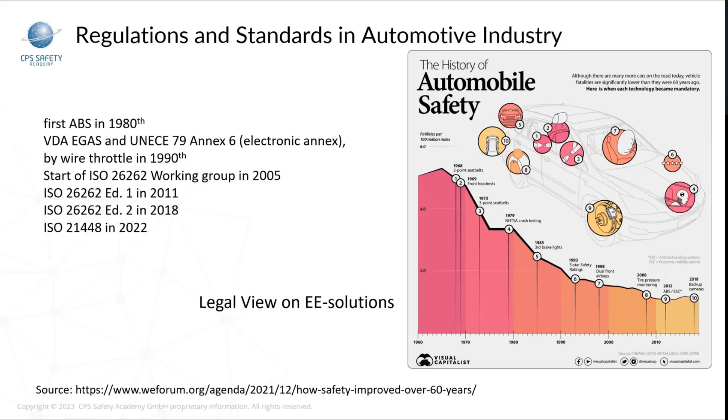One important thing is also legislation. I think we are here with verification, but one major topic became transparent when we started here, that the validation topic needs a wider room, because most of the regulations were just compliance to the requirements that we have, but they realized that that is not sufficient.

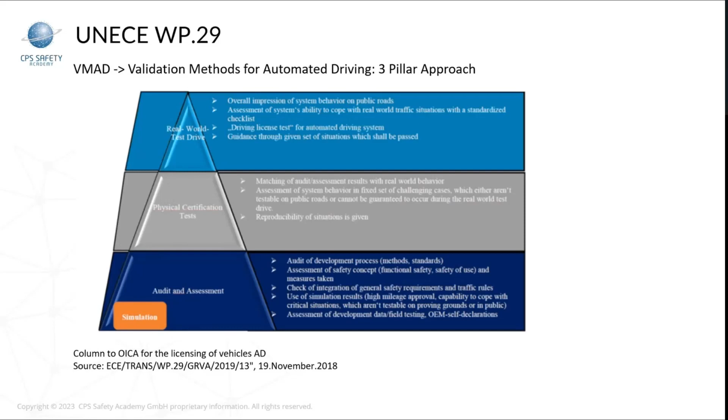So Working Group 29 defined a 3-pillar model in order to make several different solutions for how to provide evidence, for example, especially for automated driving functions, but also other functions where we have to deal with uncertainties. One of the major examples is that we cannot just prove with physical tests or technology tests that systems work, when a pedestrian moves between parking vehicles, and parking vehicles are not structured enough that we can perceive that with technical devices.

So there is a huge scenario space, and the development of test scenarios is necessary. There are not only real world tests, but also audits and processes necessary to assess, so that you get proper simulation, and to provide evidence that the simulations are adequately structured for that.

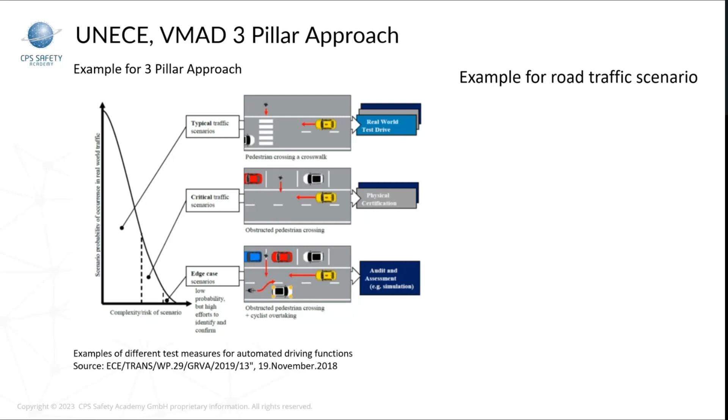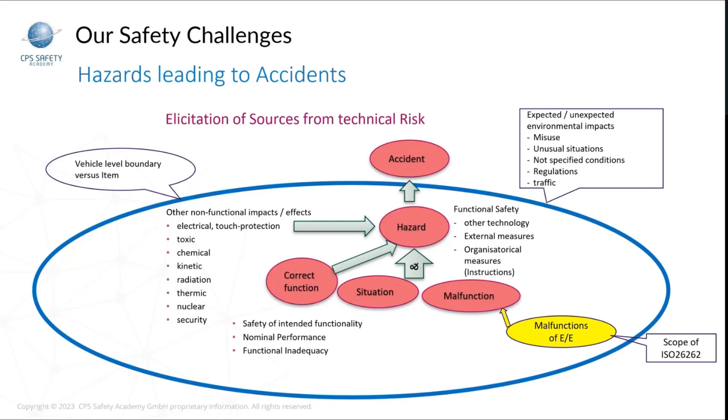Unfortunately, when we developed ISO 26262, we had a lot of exemptions in it. You see here a small sketch of how we at the end need to deal with those exemptions. And we have to find solutions in order to avoid accidents in public traffic.

I think one of the most critical points is when we're talking about the limits and the typical behavior which derives out of the vehicle dynamics. We have huge functional dependency in longitudinal and lateral management, and especially the actuators like brake and steering systems have sensitive control circuits to make sure that you meet all the requirements, so that especially in a very dynamic driving situation, you are still able to control the vehicle.

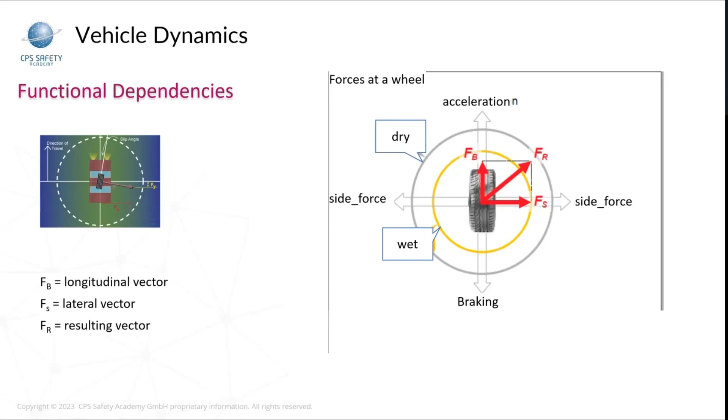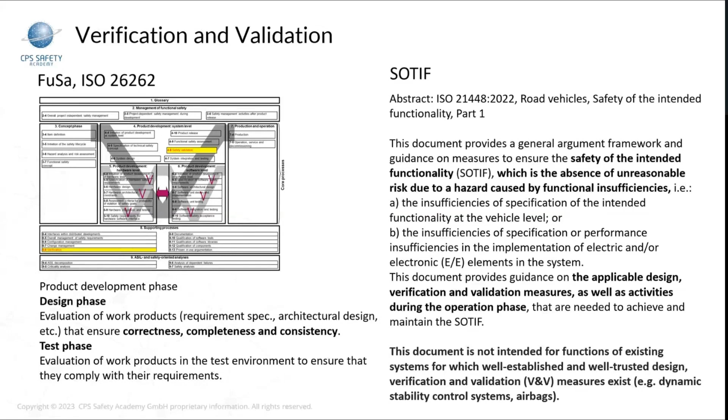In 2022, ISO 21448 was published, and SOTIF is the abbreviation for safety of intended functionality. Here, of course, we get a significant focus not only on verification, but also on validation. I'll go through some slides quite quickly, but you will get them in the handout, so that you can read the details, because there are some challenges necessary to consider.

First of all, when we're talking about safety of nominal performance, we see that we have inadequacy and insufficiency. Inadequacy could mean wrong functionality, wrong situational context, wrong operational condition, environment, or that control application is not sufficient. And also that we have really low performance and different characteristics for that.

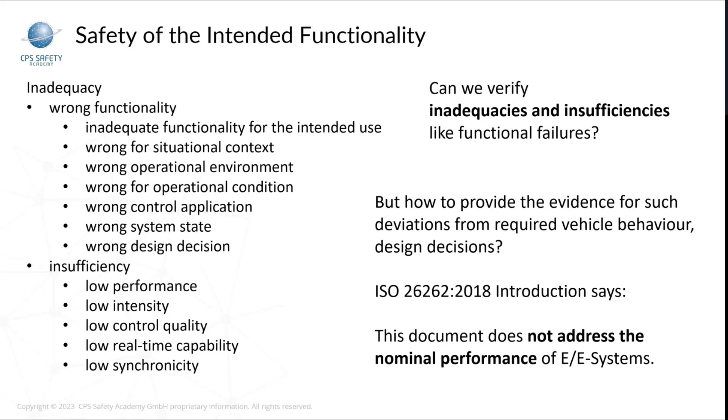Unfortunately, ISO 26262 said to us, this document does not address the nominal performance of E/E systems. So what we should do in order to provide evidence is make sure this also impacts not addressing any issues which lead to public accidents.

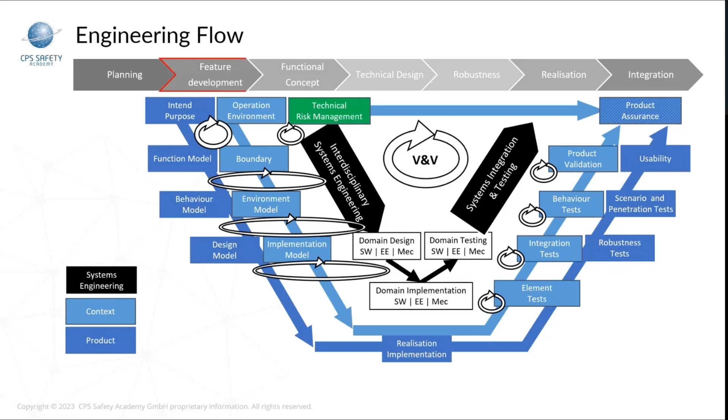And this physical view, unfortunately, is today not sufficient to consider such an application and to really assess if our electronics and our software are working correctly.

When we convert to hardware, and as I've learned, you in the audience are mainly hardware experts, we see that we need a similar architecture and hierarchy in our structure, so that we have a vehicle level, a system level, a component level, and a realization level. On the realization level, you see the circuit diagrams, how we see our resistors and elements.

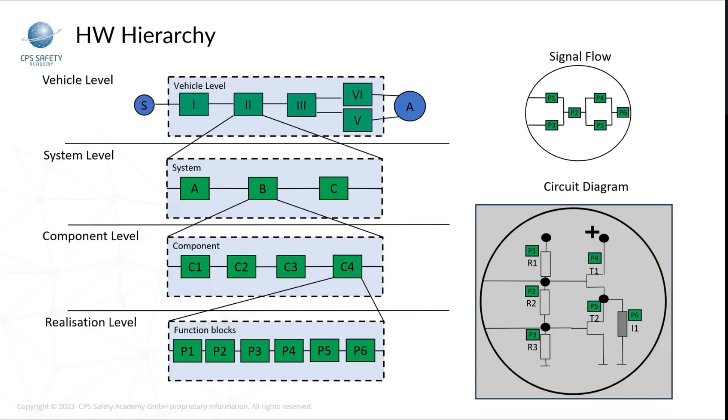We see a signal flow on all four levels, for example. And here we can start to assess and validate if our requirements are correct, and of course verify that our requirements are fulfilled by the implementation.

In the automotive industry, especially on this lower level, we have robustness testing. The major domains are LV124 and LV148. By the numbers you see it was dominated by the electrical power network in a vehicle. In passenger cars we typically have a 12-volt system, in lorries typically 24-volt, and we started to standardize a 48-volt board net for hybrid vehicles.

But that was stopped due to discussions about hybrid benefits, etc. Today there is also LV400, etc., available for high voltage systems and even greater voltage levels. This is not really a public standard, it is more broken down into typical brand or OEM standards. For example, Volkswagen 80,000 and Mercedes-Benz standard LV124 is the same name - the origin comes from Mercedes-Benz - and it's used in the BMW Group standard as well.

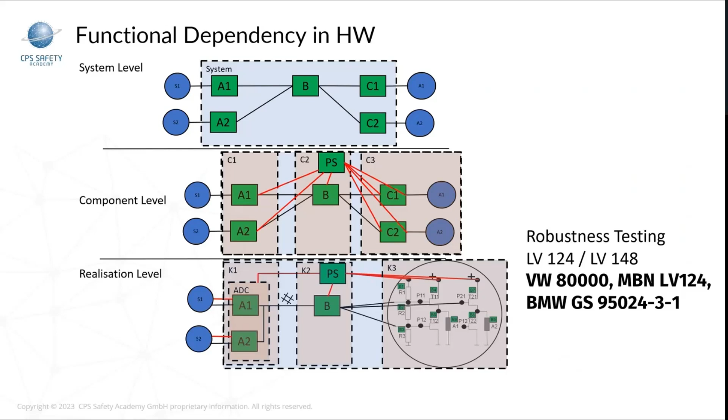Then you see the typical tests. These are not just purely hardware tests where you start the hardware. You also see energy recovery, start pulse, short interruption, reset behavior, etc. - these are already system tests involved to really assess the hardware. Hardware tests alone are not sufficient, so we have to do system tests in order to really assure basic hardware criteria of the element.

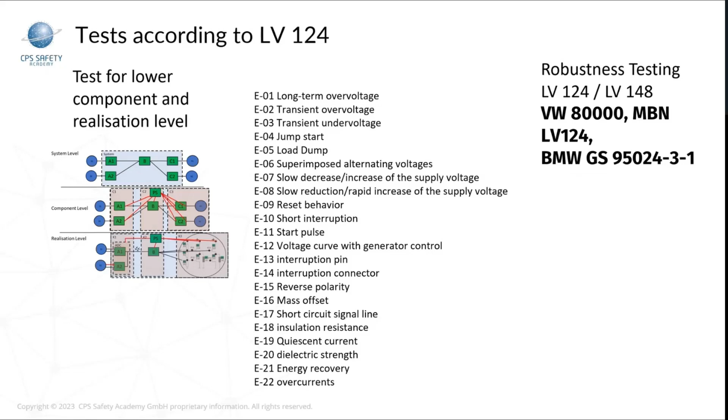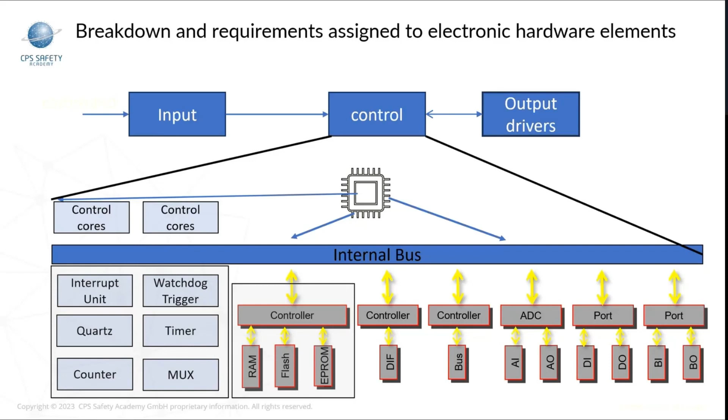We already had a few discrete elements. Let me break this down a little for a standard microcontroller. In a standard microcontroller, even in silicon, we have quite a lot of functional groups. This is not the realization of the silicon, just the functional groups which have different functions in such a microcontroller, which must be combined and used in a certain context in different applications.

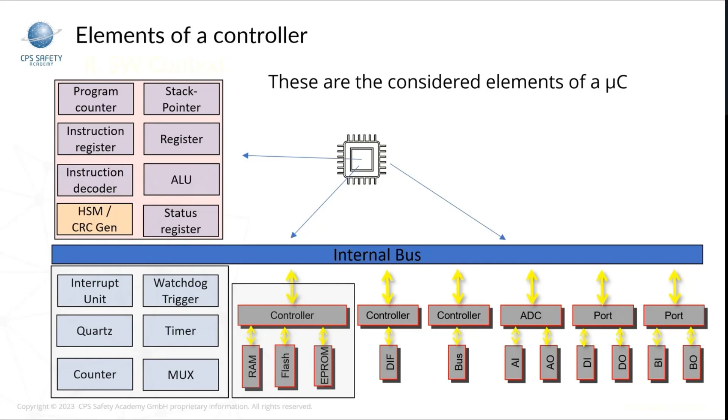Here, for example, we have functions which are typical core functions, very close to software function. And we have also typical functions dominated by bringing the outside world and the inside world together, connected by an internal bus or crossbar, however you want to call it.

Sometimes in automotive and safety applications, we quite often use single core lockstep. In this case we have just two cores, and maybe one core is dominating and the other is working in shadow mode. Or we have multi-core principles in somehow a lockstep principle, where those cores are connected to the internal bus and could write and read from the I/O and outside world, and could also have independent connection to the operating function blocks in the system.

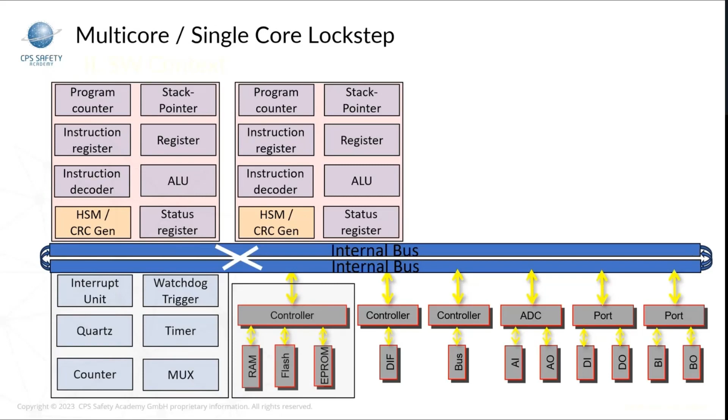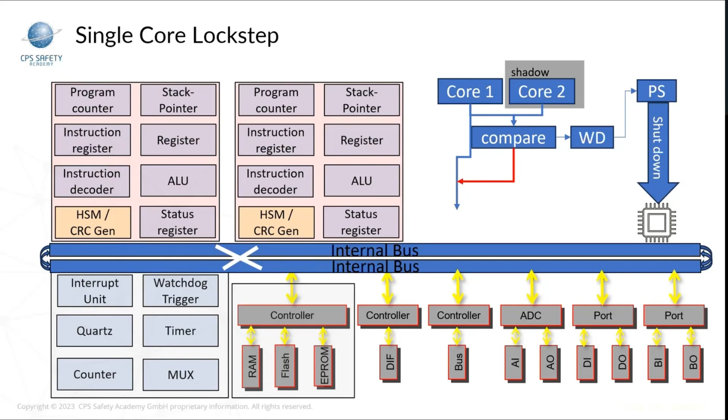What we typically do, for example when working in single core lockstep or lockstep in general, is have a core 1 and a core 2 which are comparing with each other. When the comparison is unequal, we quite often go to a shutdown and degrade the entire microcontroller. This is, at the end, to keep a system under control, very questionable.

When we go to typical analysis of software elements, we see quite a lot of parameters influencing the correct behavior or functionality of a software module. There is really the input and output, which are mainly used in safety analysis from software, but the configuration, the time assignment, the resource assignment by scheduling, etc., are also major sources at the end for incorrect functionality in the software.

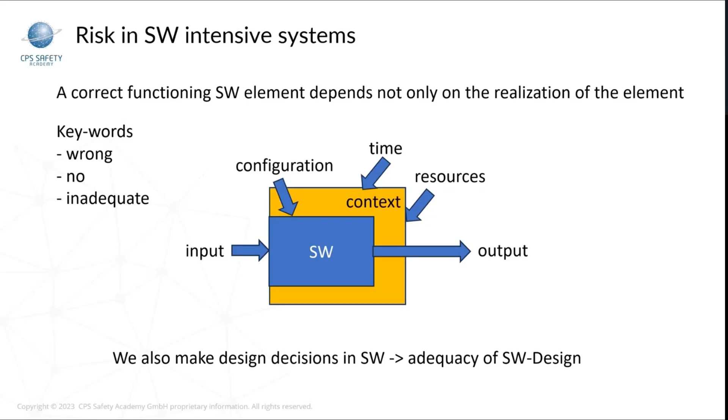Now we're coming to the hierarchy, where all those requirements come in. When we have an architectural view, we need a neutral observer so that we see the vehicle in the road environment from a neutral point of view, to see the relation of the vehicle to different people in the environment, and their behavior and our vehicle's behavior, and how that relation derives what kind of risks.

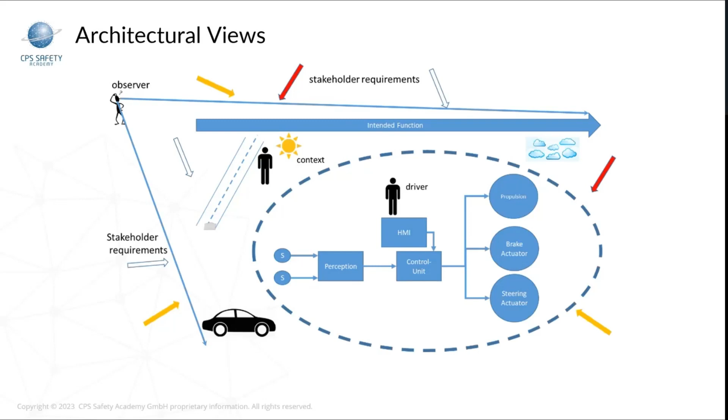In order to get that more structured, there is, for example, SAE J3049 that proposes a hierarchy in the structure, how to structure that and bring that down. They consider in level 0 the ground vehicle system, which controls the vehicle, and then break it down also to environment, driver, passengers, and the vehicle. Under the vehicle, you find the classical powertrain, chassis, body domain, and HMI topics, until we break it down even to wheels, steering system, and brake system.

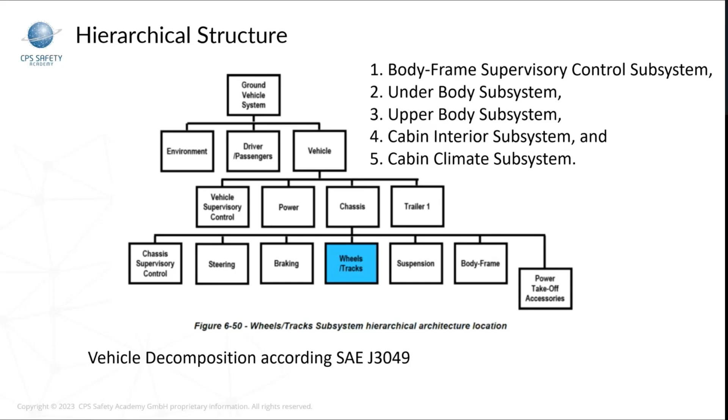This is just one example, which I recommend you consider when you have these issues, because I'm addressing topics which are at the moment quite difficult to handle in the automotive industry.

Usually the basic idea of ISO 26262 was that the upper level will be defined by an OEM, who defines the so-called item definition and the functional safety concept. This functional safety concept would be spread to different tiers, and the tiers provide a technical solution, which we call the technical safety concept for the different devices.

But one basic functionality, for example steering today, is not based on just one control unit. There are several control units available. When we talk about automatic driving, we see that we have a high electronic sensor set, sensor fusion control devices, ADAS control devices, until we go on to the classical steering and brake controller, which also cannot work according to the same principle as all these other devices.

And of course, we have to validate that. But in order to validate it, we need significant information about the EE architecture, so that we know, for example, the power supply, the placement, and the way how they are connected, and what is the runtime and prioritization on the network and all that stuff.

And if we don't consider those requirements for our application, we run into difficulty ensuring, for example, that we can design and make the lower level decisions in the right structure.

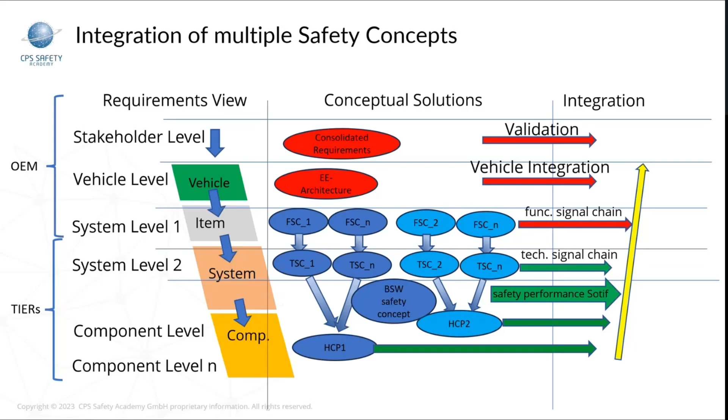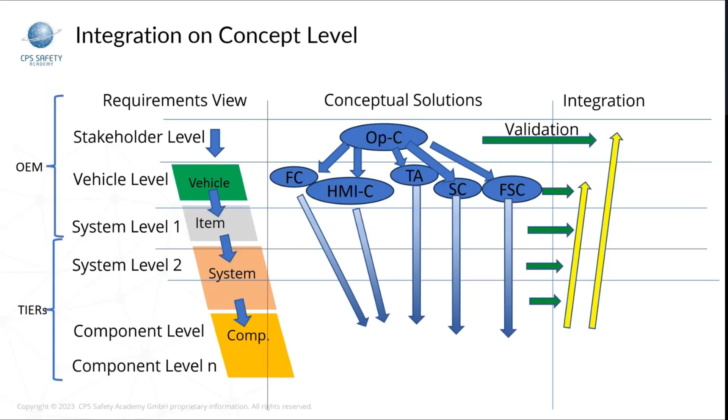On top of that, we not only have a functional safety concept, we also have to implement the basic functional concept for usability. We have to implement an HMI concept. We're developing a TARA, a threat analysis for security measures. We have a SOTIF concept. We have, of course, the functional safety concept. And all that needs to be integrated into one control unit, and we have to provide one solution for all the requirements derived from that heterogeneous structure.

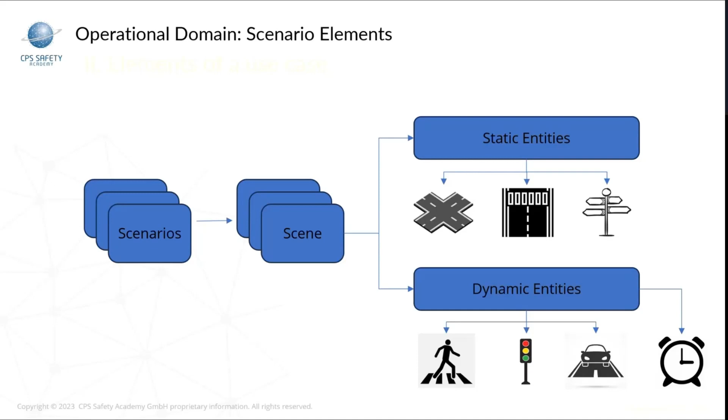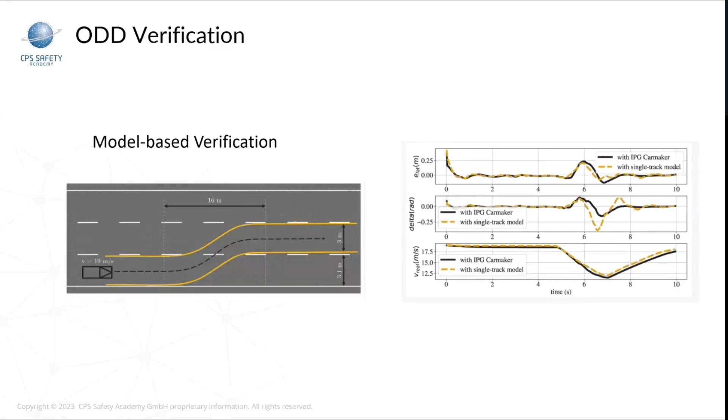Then you see that you have a huge range of scenarios in automated driving, which derive and define different system and operating states, different conditions, and different states for the system, where today we find a quite interesting model-based verification approach, where we can see how the vehicle drives in different scenarios, and we can manage the challenges here.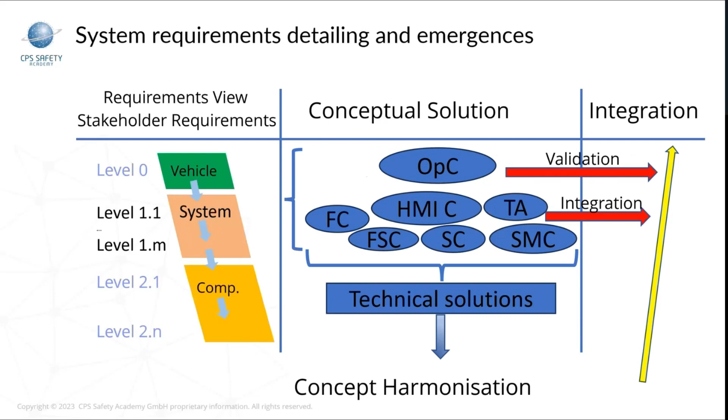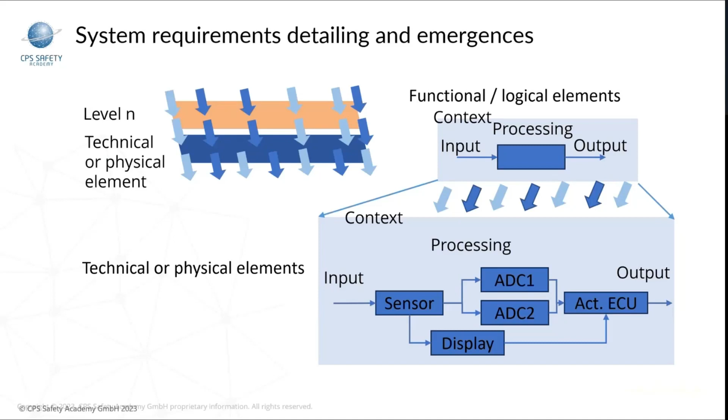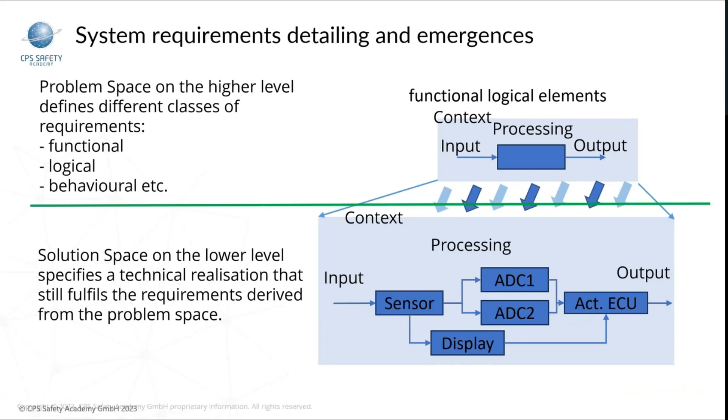Such an operational concept needs to address certain things. We have certain solutions before we can integrate and validate this technical solution. Typically, we see that we have first a logical context and a functional context, and we have to break that down and provide a technical solution for it, so we have one upper state, a functional and logical behavioral structure, before we come to the technical solution.

On a higher level, you see that we have an operational design domain, where we see the degree of freedom and how the vehicle is moving. Then we see, of course, the behavior of the vehicle inside that operational domain.

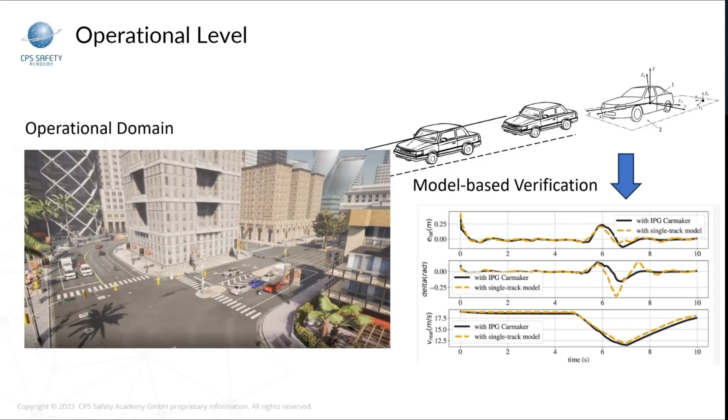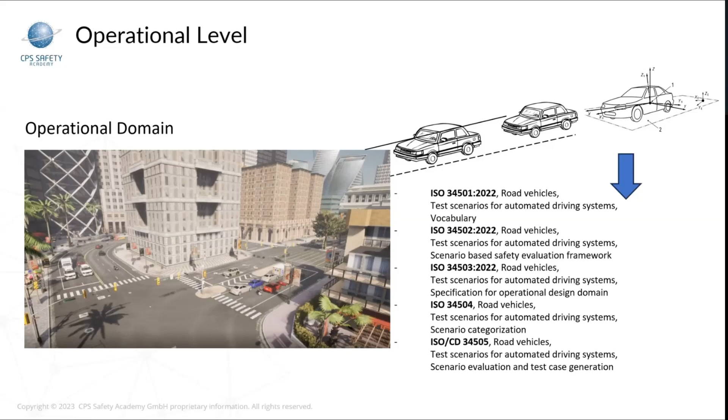Unless we come at the end here to one important thing: how we test that and how we validate all those things. So this huge set of standards is developing to find verification measures and validation measures and to develop the right test scenarios for those applications.

For us, it's very important that the application is complete and that we are also consistent and correct. This is one of our key criteria.

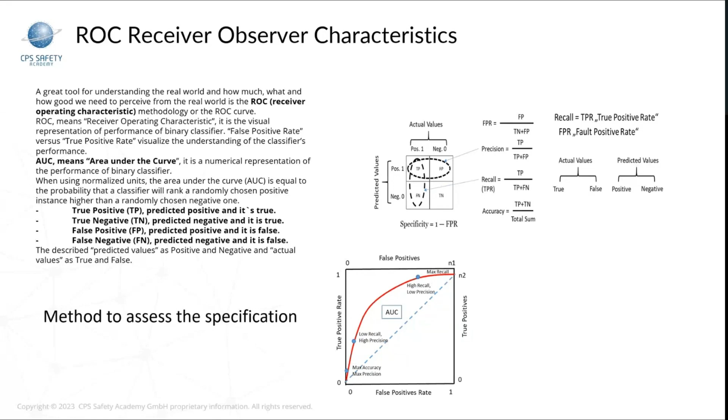For example, one method which is quite old, the receiver operating characteristic, can give us insights into whether our specification is correct or incorrect, so that we get, for example by means of area under the curve, whether we're talking about true positive, true negative, false positive, or false negative.

In a real situation, we have a state machine. So we have steady driving, and steady driving can lead to a certain failure condition where we have to perform a minimal risk maneuver, so that we come into a minimal risk condition, which is still an active function that needs availability for the electronics.

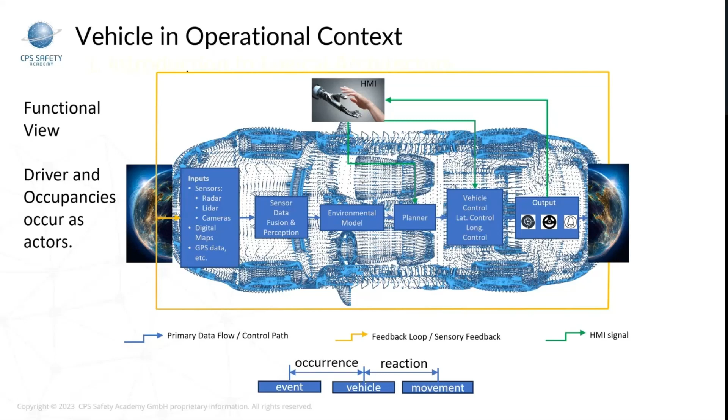When we look at a vehicle on the higher path, we see, for example, for such a control device like lateral or longitudinal control, that we have a lot of feedback loops at one time over the HMI, so via the driver or via the environment or any other interfaces that we have.

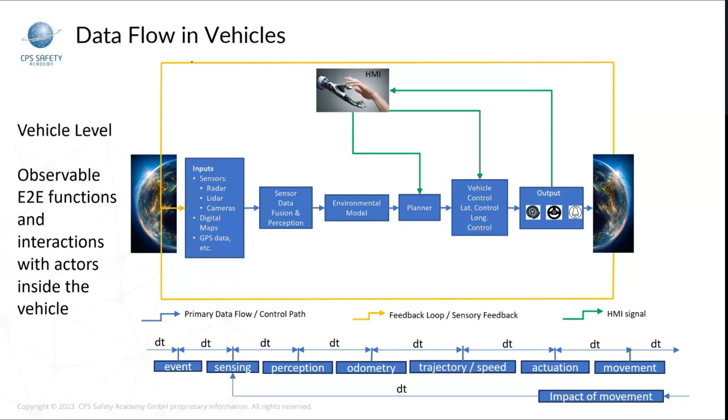When we break down and don't see the context, we don't see the outside world anymore. And when we're on a system level, we don't see all those interfaces anymore. Whenever we're on a different level, and whenever the OEM or different tiers make design decisions before we start designing this microcontroller, microprocessor, or FPGA, we have a lot of verification and validation steps behind in order to assure we have the right requirements. So a breakdown and verification is only possible if we really know the typical contents of those applications.

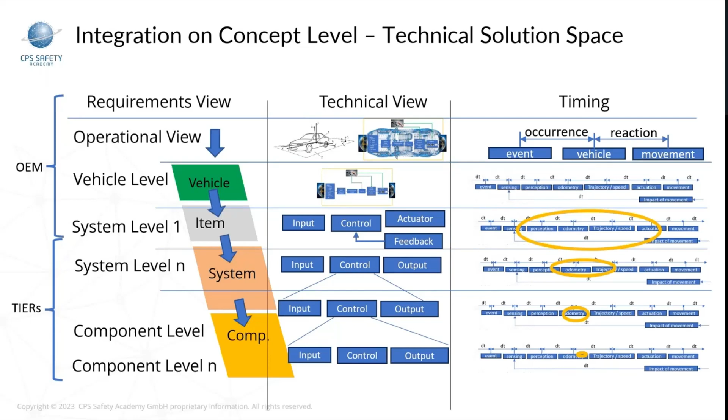In the example from a timing diagram, whenever we see a reaction and the device decides that we change, for example, from braking to an ABS situation, we end up at a very small element which decides if we brake, steer, or do whatever vehicle dynamic function. Here there's a key question: how do we verify all that by means of verification, or do we need other validation methods at the end?

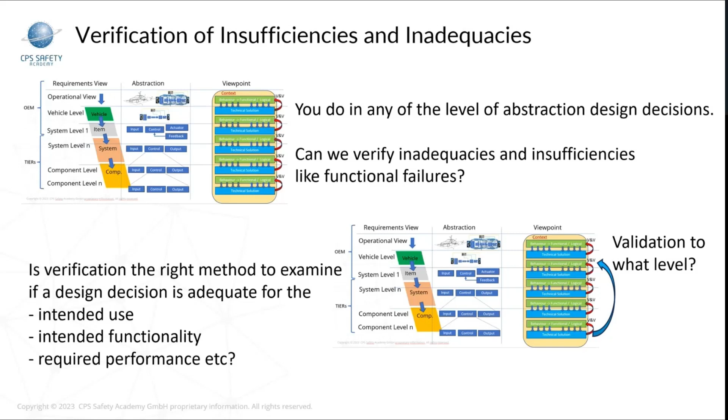The big question is, for example, at a typical hardware level, how do we validate all that criteria needed for intended use, intended functionality and performance, so that we're able to make assessments if that is correct, complete, or consistent?

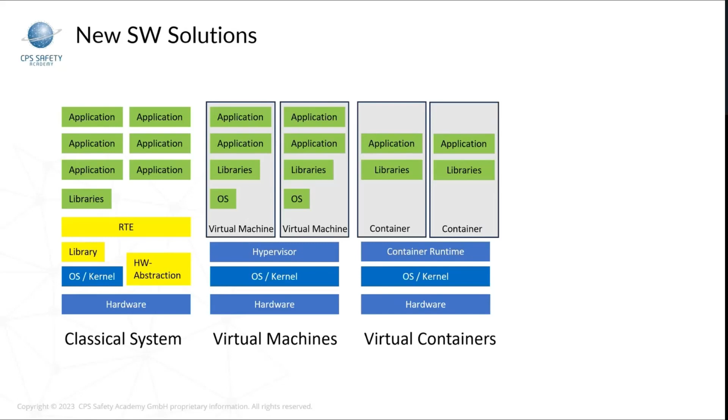Typical new applications no longer use embedded controllers; we're going to high performance computing devices. We have applications with virtual machines and virtual containers, and the hardware goes much further away from that.

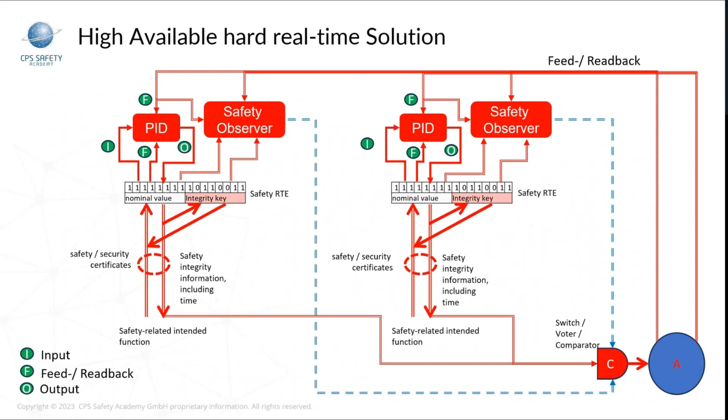In history, I already mentioned we had a VDA E-Gas approach. But today we have redundant controllers which need to be synchronized and parallelized in time. It's very important that we work in closed and open loop solutions so that we achieve synchronized and proper behavior of that PID controller in its given context.

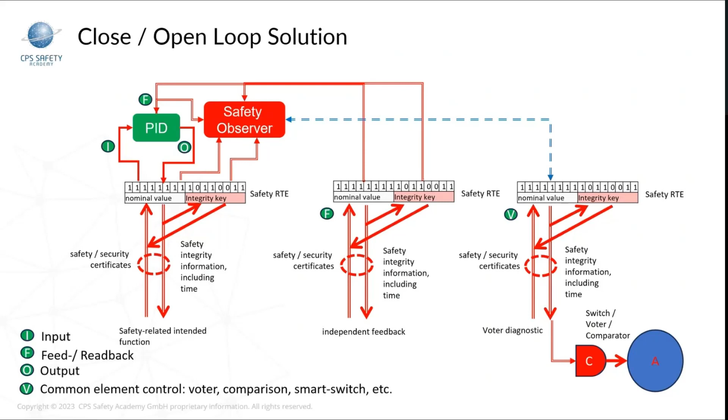Unfortunately, AUTOSAR gives us some ideas on how to measure and monitor performance. But for all the safety mechanisms we need to assess, we really need to break down what the correct specification is, so we can assess safety-relevant features, functions and characteristics during runtime.

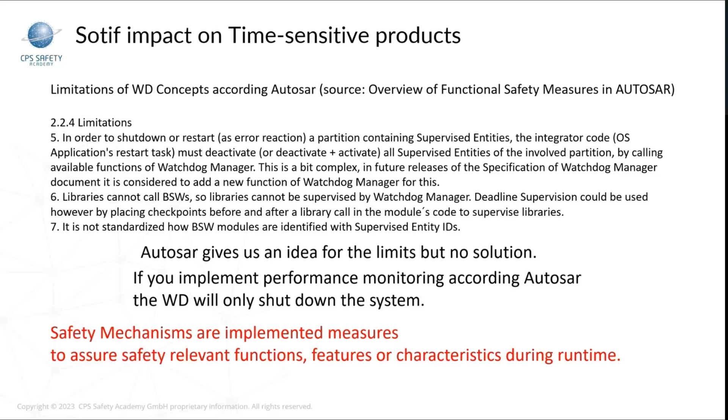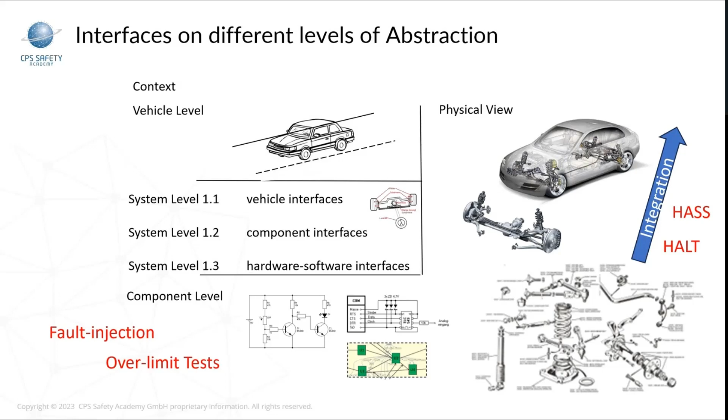Coming back here, mechanical is easy. But for example, in aviation technology, where they have similar issues, they go not just to fault injection over limit tests, they also do HASS and HALT during integration, which gives evidence about the possible integration.

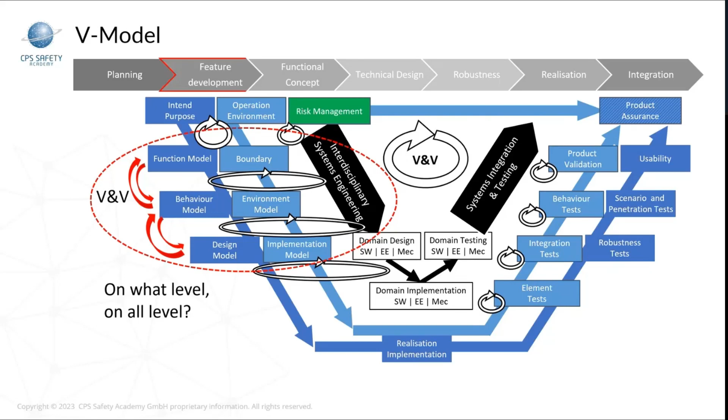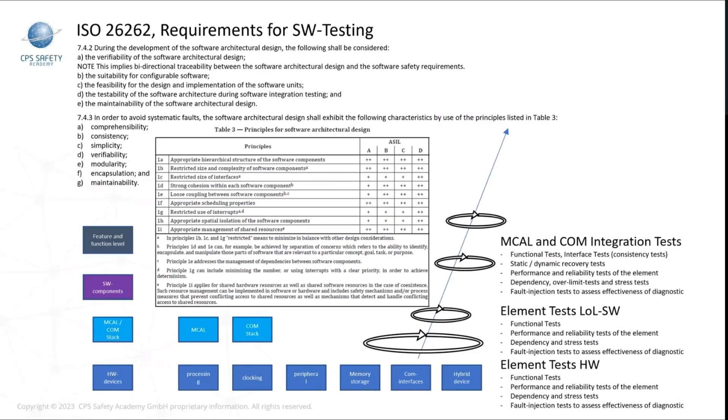So we come to our model, where we have to do a lot of verification and validation in the specification, as already mentioned in the legal requirements derived from the validation method for automated driving. Typical software testing measures are needed because microcontroller or FPGA testing without the firmware or software is nearly impossible.

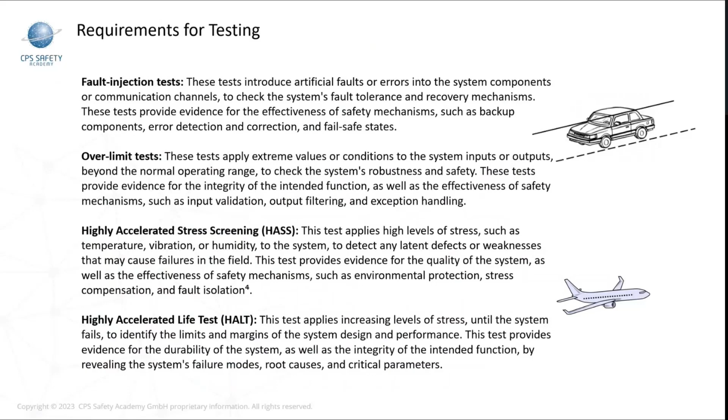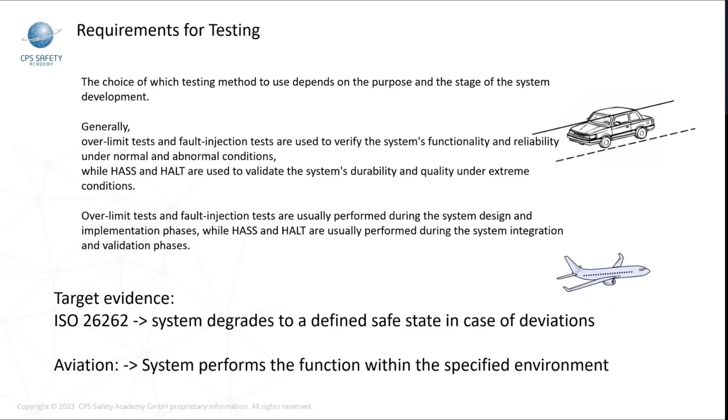So we need to go a step beyond, coming up with requirements-based testing and then to the system level. The old ISO 26262 statement was that the system degrades to a defined safe state in case of deviation. Now we have to assure that a certain function will be realized in the specified environment. This is a very challenging situation.

Legal requirements, roadworthiness of vehicles, new technology, etc. have to provide new solutions, and sufficiently transparent requirements in natural language are nearly impossible. So we need a model-based approach, and we need to find solutions so that we can realize hard and firm real-time safety-related systems.

Thank you very much. I'm a little bit over time, but I hope you can excuse me. Thank you for your attention.